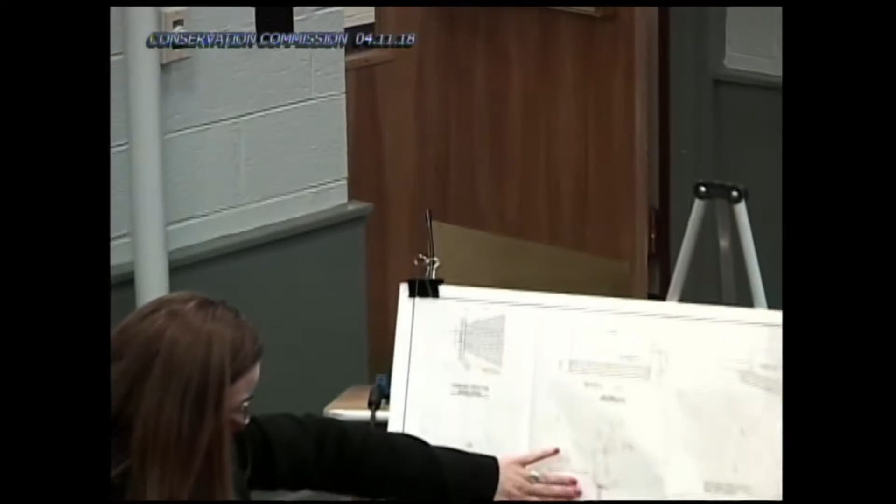We're not the engineers for the double track. I understand that question, but it doesn't look like there is provision for the second track over this culvert. When Holly comes back, she will present the engineered plans. Currently the layout reflects existing conditions. We are going to replace the culvert, and then maybe in the fall, I'm not sure of the timeline, they will install the second track. So when we're done with this culvert, it will still be one track. We didn't want to misrepresent that.

Wait a minute, are these related projects? Please identify yourself. Holly Palmgren, MBTA. There were two tracks along this entire alignment, which I'll show in my presentation after hers, but one of them was removed in the past 50 to 60 years. So this is capable of handling two tracks? Yes, there's enough space. That is why. Yes, there's room.

That's all I wanted to know. Right, we used to have two tracks. Okay. And I believe after the project is finished and the double track project is finished, there's still room within the headwall and the tracks. So it's designed to meet the requirements for the double track. You're not going to have to revise this plan to accommodate that. No.

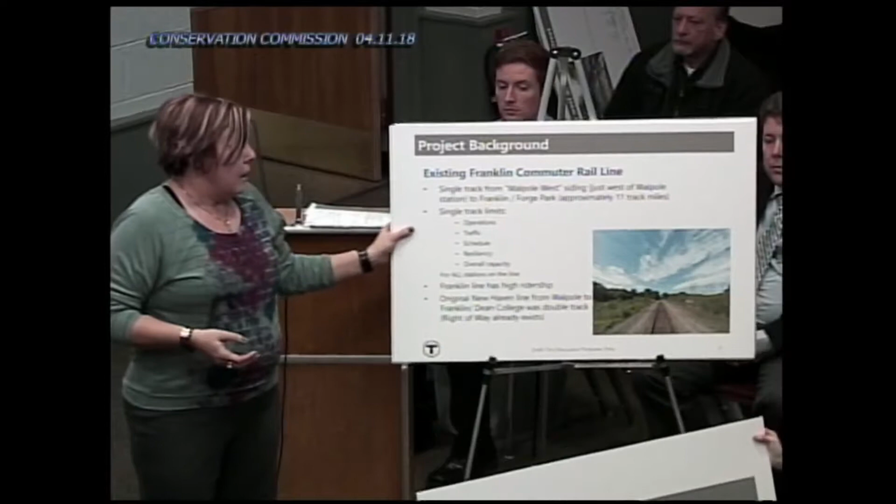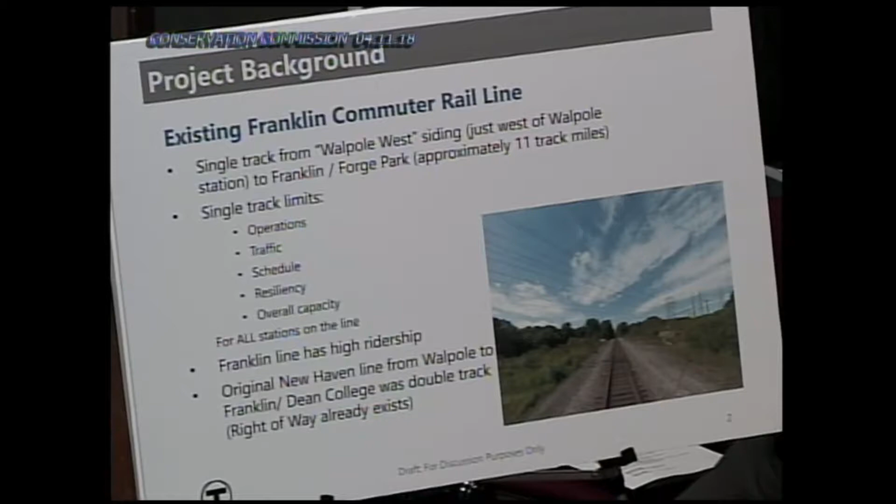It's along the existing Franklin commuter rail line. Right now it's single track through Walpole and Norfolk, which limits our operations sometimes if you ride the train. You'll notice sometimes the trains have to stop—this is where the only passing siding is, so the other train can pass. This will allow operational flexibility for the T.

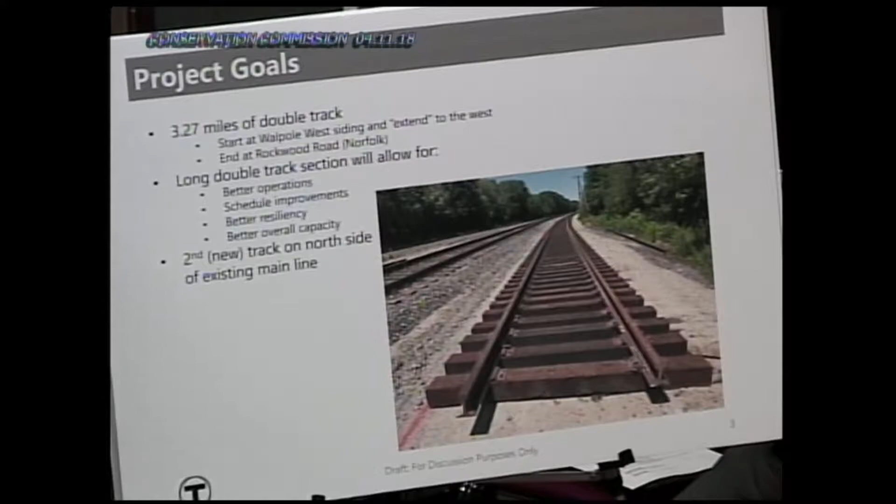So the Franklin double track project—obviously not all of it is in Walpole, but the whole project is 3.27 miles of double tracking through Walpole and Norfolk. This is the project from Norfolk Station all the way up into Walpole. This is the full project.

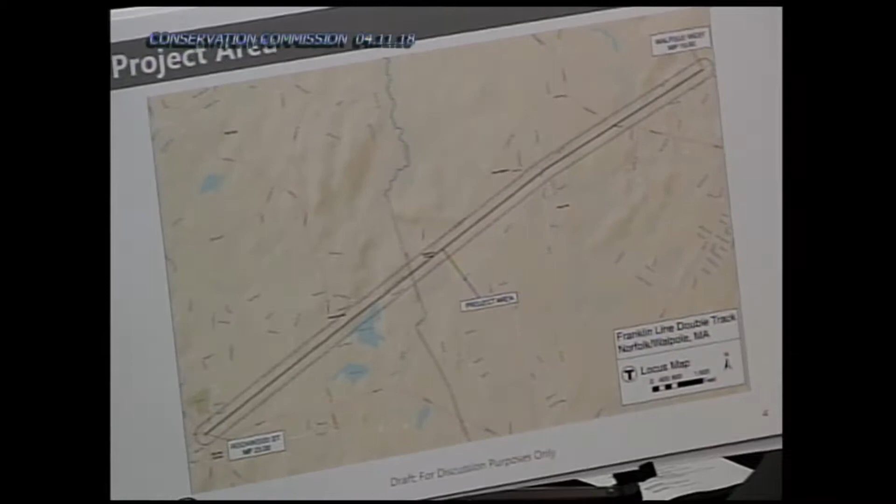So what I wanted to mention—you saw Keolis come in before for some culvert work that you approved, this new culvert. I have another filing on your agenda after this for some grade crossing work, and I have a filing for the double track work. So there's a lot of work going on in Walpole.

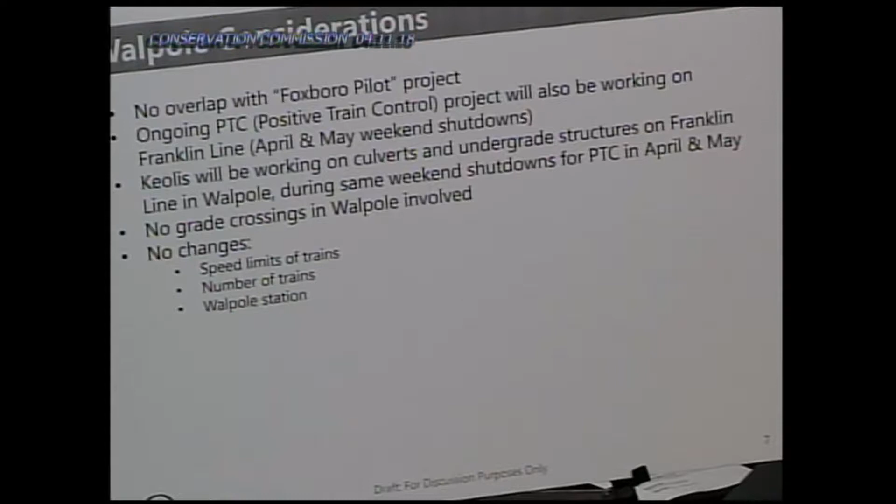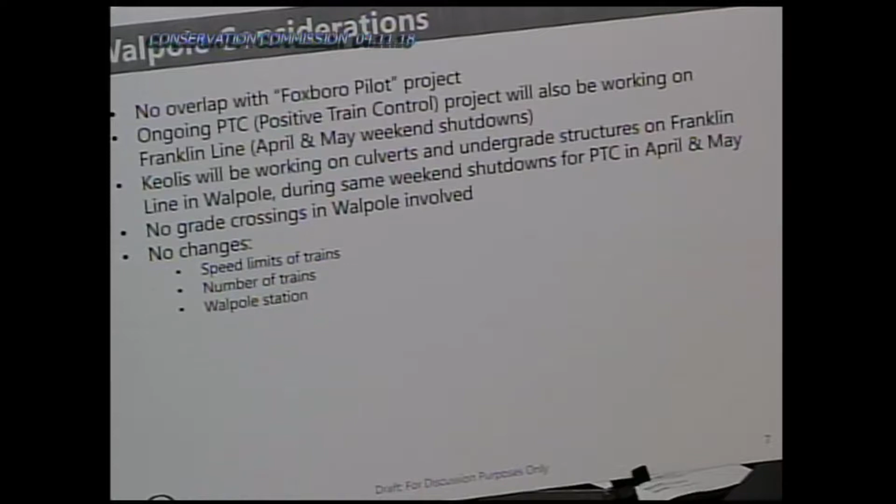This double track project is not part of the Foxboro Pilot project, which is its own separate project. You've probably seen poles going up along the alignment for PTC, positive train control, which is happening along our entire system, partly in Walpole. Keolis is doing the culvert work, which they've presented to you as well. For this double track project, we are not doing any grade crossings—there's a separate grade crossing project being done for safety enhancements over at Summer Street.

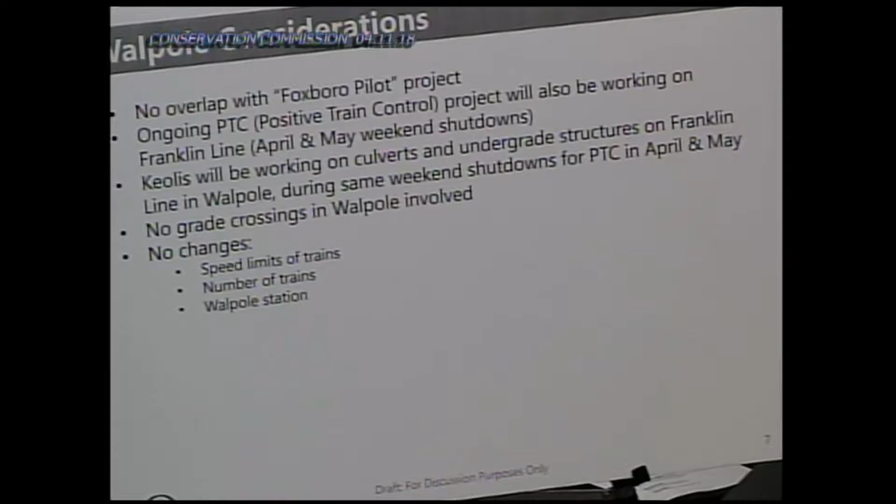So these changes are not going to change how fast the trains go, how many trains, or what's happening at Walpole Station. It just makes operation a little bit easier and less likely for delays.

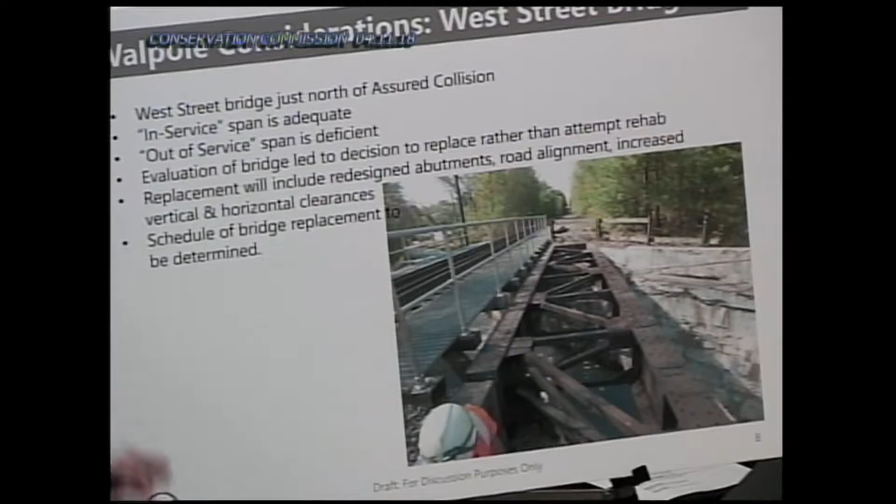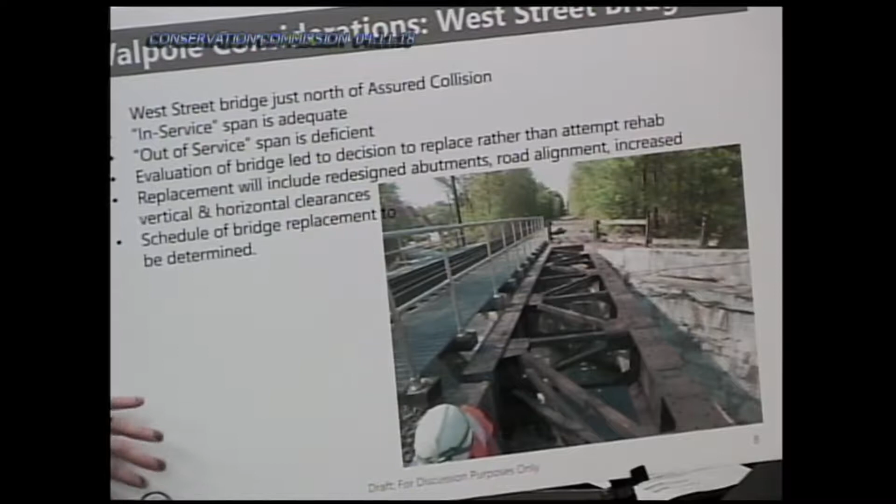I wanted to mention the West Street Bridge, which is not part of the double tracking project. The whole area currently slated for double track did have two tracks in the past when it was originally built. One track was removed, and we're reestablishing that. So West Street Bridge used to have two tracks on it—it doesn't now. It needs a little more work, so that's being done as a separate project, the bridge project. It is along where we're doing the double tracking, but it will be its own project.

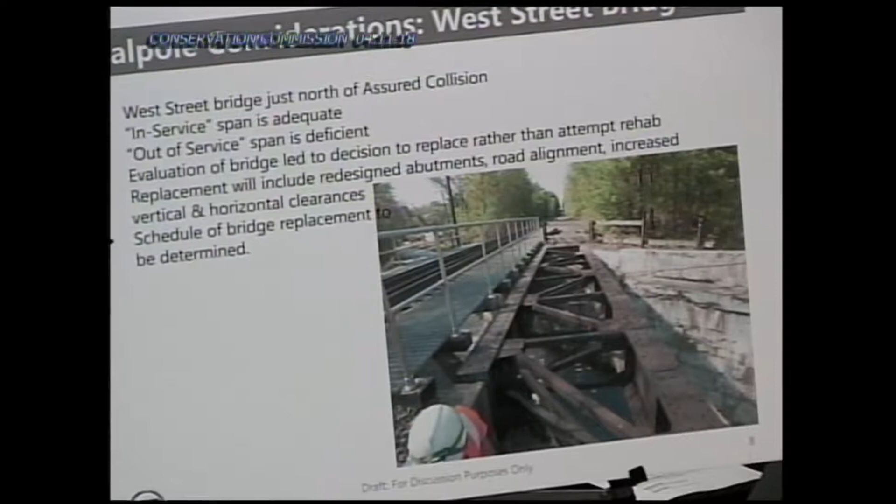I also wanted to say, because I know the town has expressed interest in the Foxboro Pilot project, I do have contact information at MassDOT if people have questions, because again, that is not part of the work we're doing here.

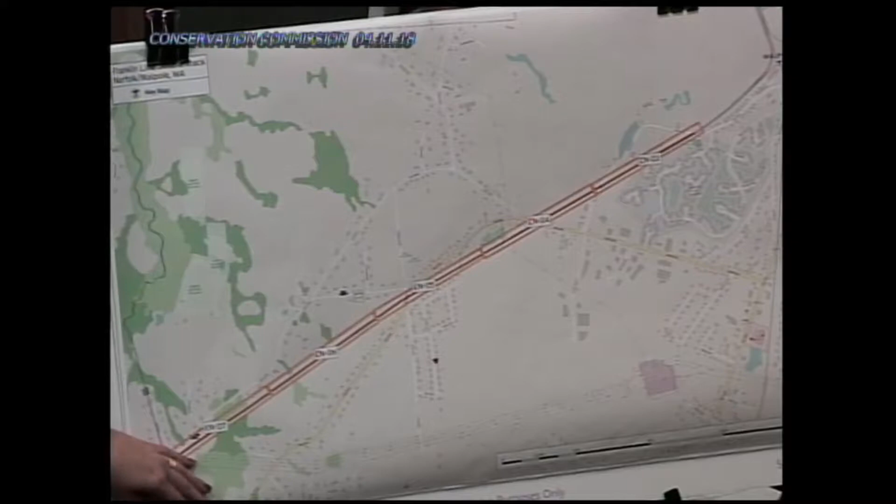So if I can get to the double tracking, finally—as the engineer had requested, we took and overlaid where all of the plans are so you can match them up and see where they were in town. I did submit a small size, but I can leave these full-size plans so at least you'll have one full-size copy.

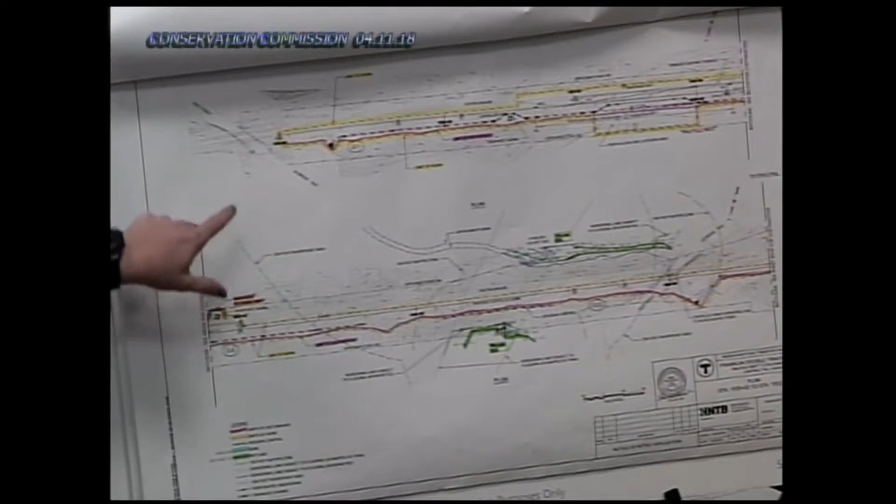So basically, all of the work remains within the existing right-of-way, and is just establishing the second track where there used to be a second track. It's along the whole alignment, and you'll see we do come within wetland areas. Work is within the buffer zone, and we've shown erosion controls on the plans where work is within buffer zone areas.

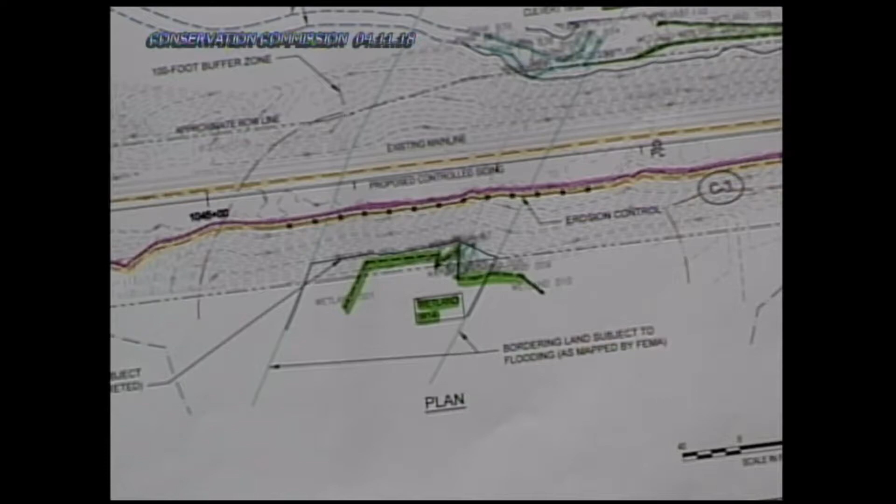Also wanted to mention, and this is an engineering quirk, that north on these plans is down, which is not how you're always used to seeing things. So just for your reference, so you can see where we are.

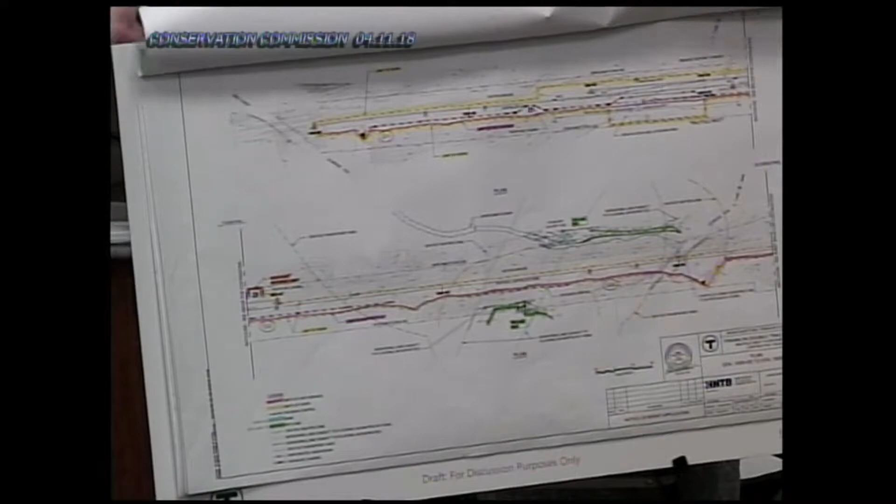I don't know if you have any particular questions with the work—I have all of the sheets. Paige, can you tell us what number you're on? Sure, so it starts at EN03, which, if you look at, the plans run from this end all the way down to the Norfolk line.

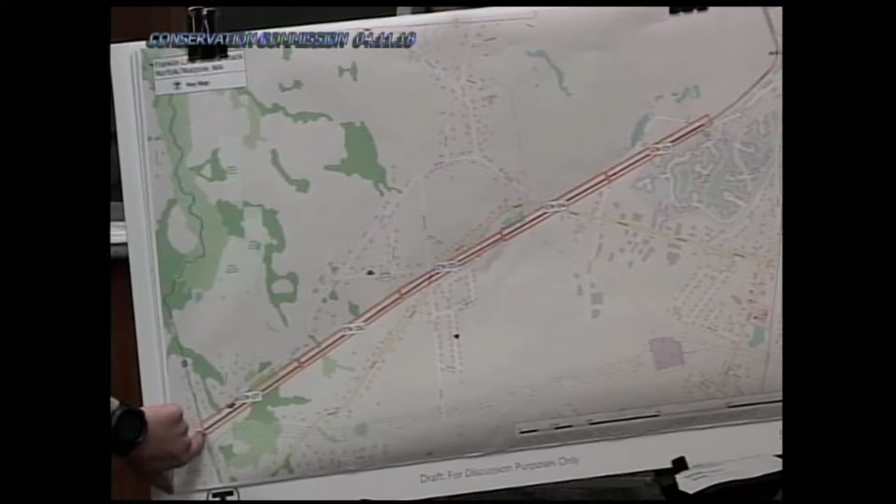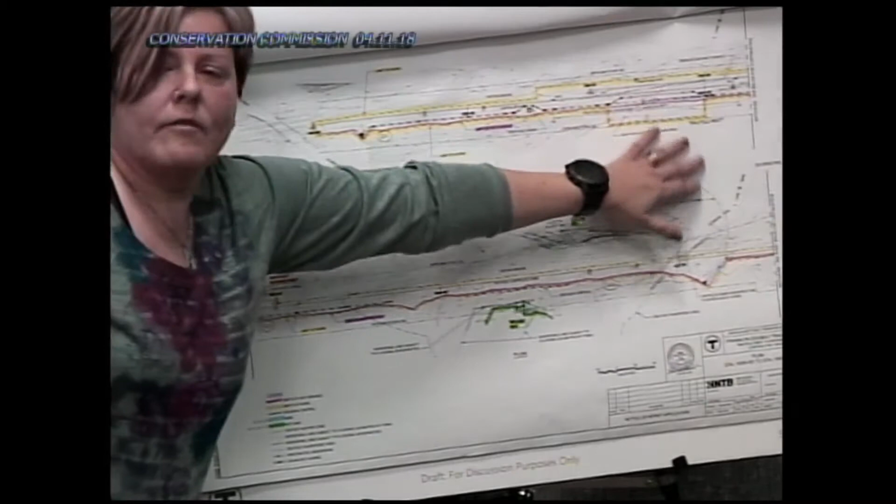And if you see on this plan—obviously at a smaller scale—these are the wetlands along where all of that work is happening. So you'll see this stretch does not have any wetlands. The wetlands come in here, and where we have wetlands, we show the erosion controls where that second track is being installed.

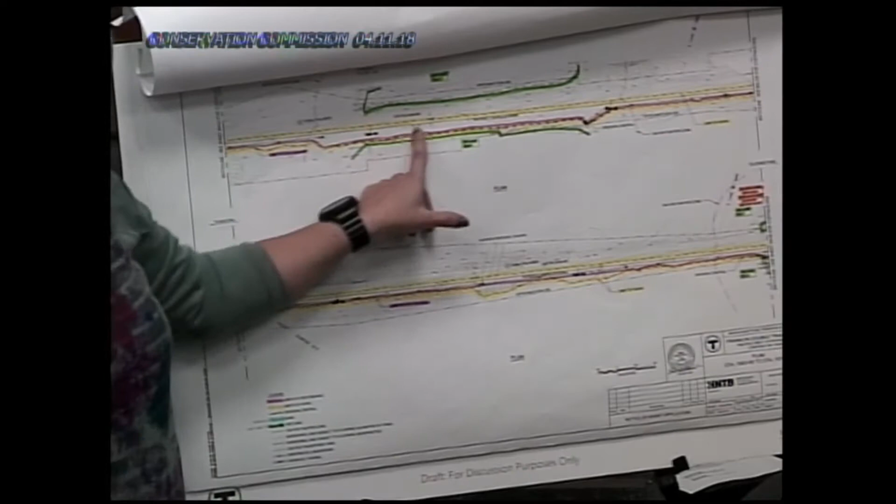And again here, wetlands, erosion controls. There are long stretches of the double track work that are not within resource areas, but they're on the plan, so you can see the entire length of the project.

Go to the revised plan that I sent. Oh, we didn't get there yet.

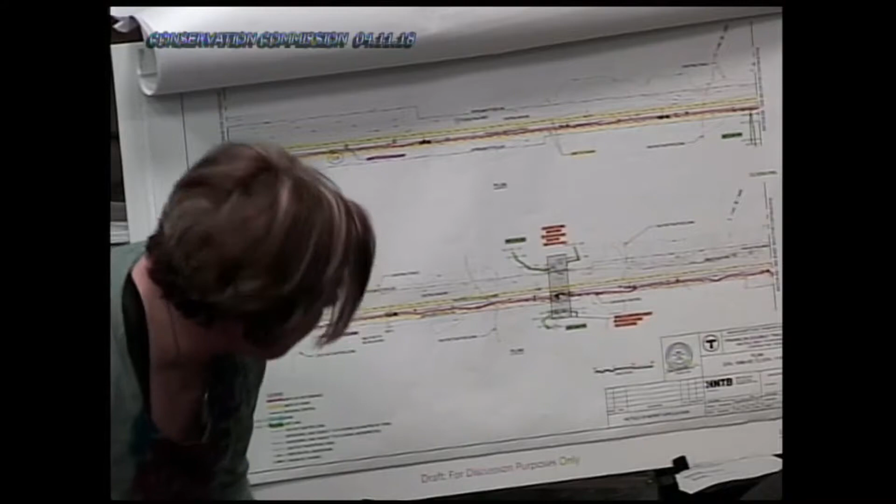So Keolis's culvert is noted on this plan. You'll see this big box. E06 is the plan that it's on, EN06, so this represents the filing that you just heard. I don't have the details of their culvert on our plan because they don't have the details of my double tracking project. But as we mentioned before, there were 2 tracks there. There's room to put 2 tracks back, and we've coordinated with Keolis to make sure that when we come in and put the second track, it all works together.

And then the revised sheet that I just submitted was for EN07.

Holly, can you just explain, on 6 again, where the culvert was, it was my understanding that some drainage system was going to be put in? Yes, so in this location, you've done a site visit out there and looked at that. So there will be, it's noted on this plan, as a perforated underdrain.

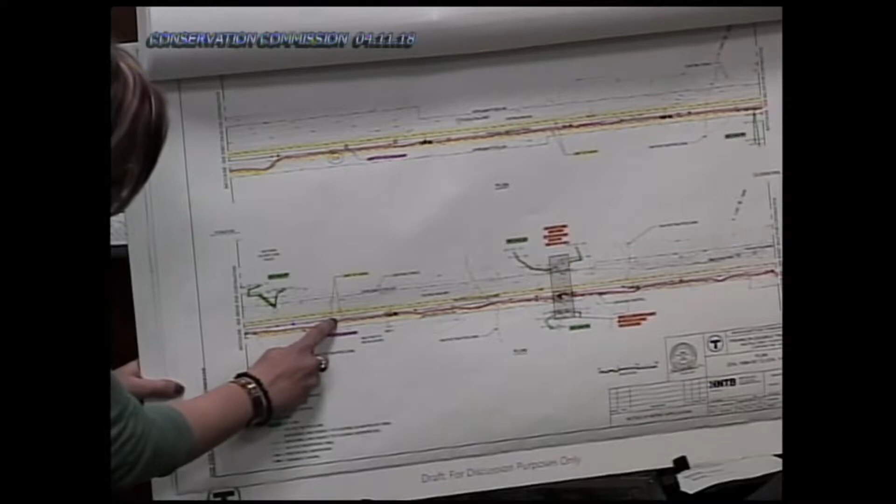So it's this line with these little triangles, which would then outlet where that culvert outlets. So currently there's a ditch along the edge of the right-of-way, and that'll be replaced with a perforated pipe. Yep, and we did do the drainage calcs for that, and our typical underdrain is 12 inches.

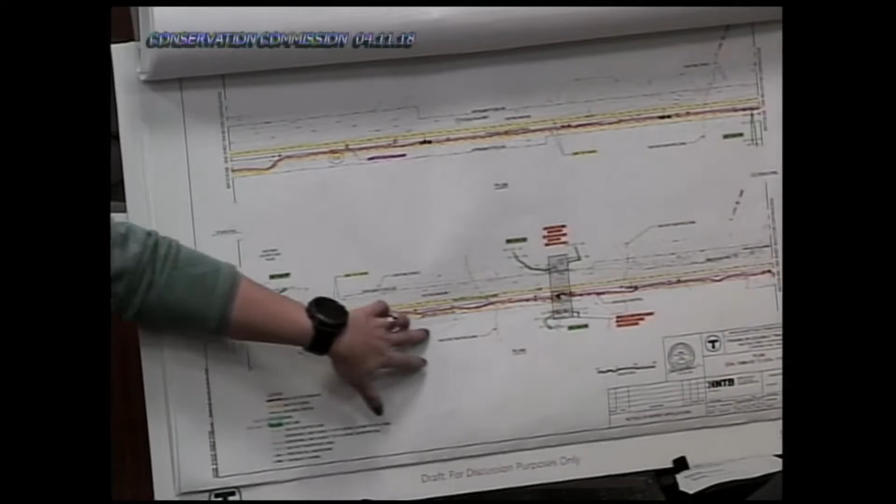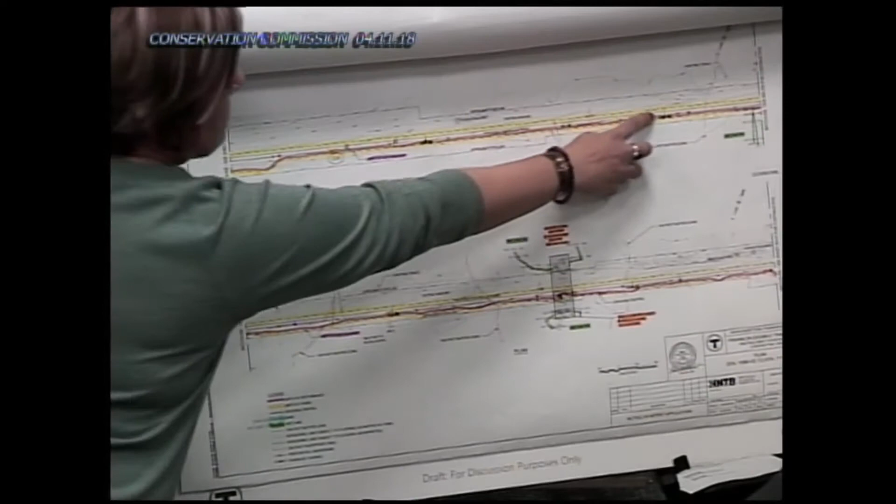We've upgraded this to 18 inches, just given what we think the amount of water is that's out there, as you saw. And is that the only stretch where that's occurring? So there is underdrain along a lot of the right-of-way. This part's not near wetlands, but yes, it's underdrain, which would then outlet there.

And so is there any area near the wetlands where you're going to be changing from a ditch to an underdrain, or is it just along here? Nope, that's the only location that's currently a ditch that's becoming an underdrain.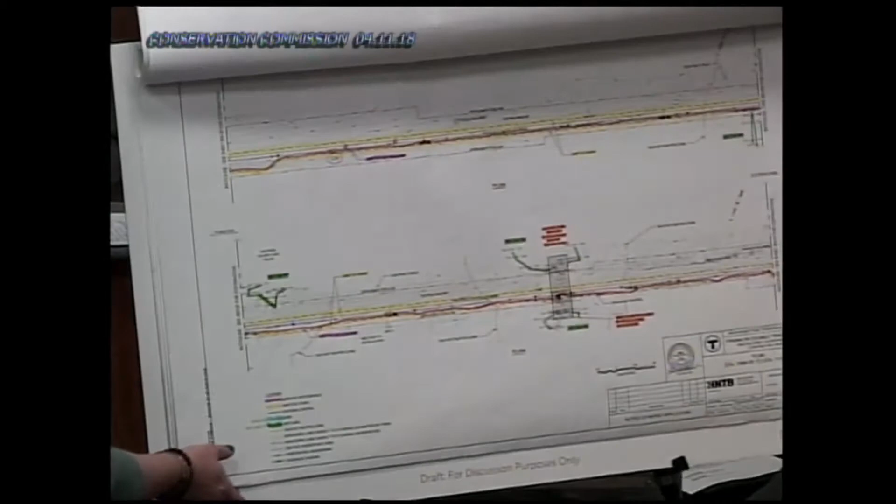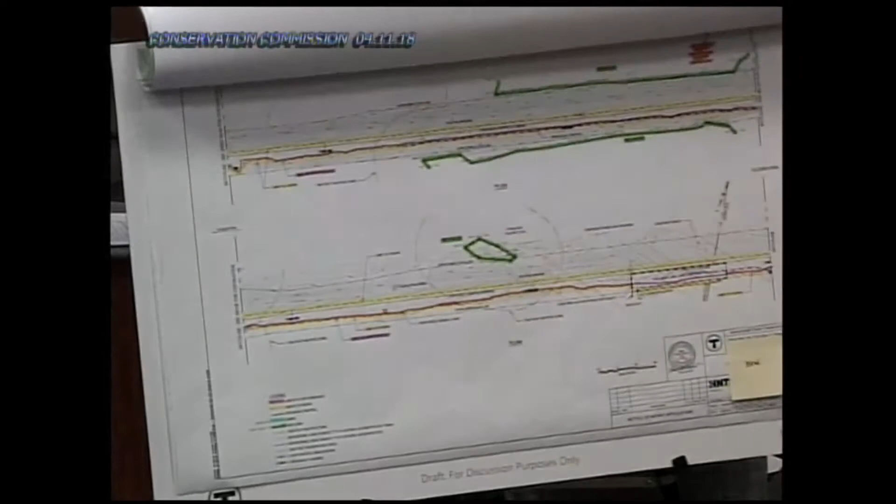So yes, you can see this underdrain comes here and then connects into where that culvert comes out. And the change on EN07 is the original plan that I submitted showed a retaining wall, which we have removed. It's now just going to be a slope, 1.5 to 1 in that location, at station 1122.

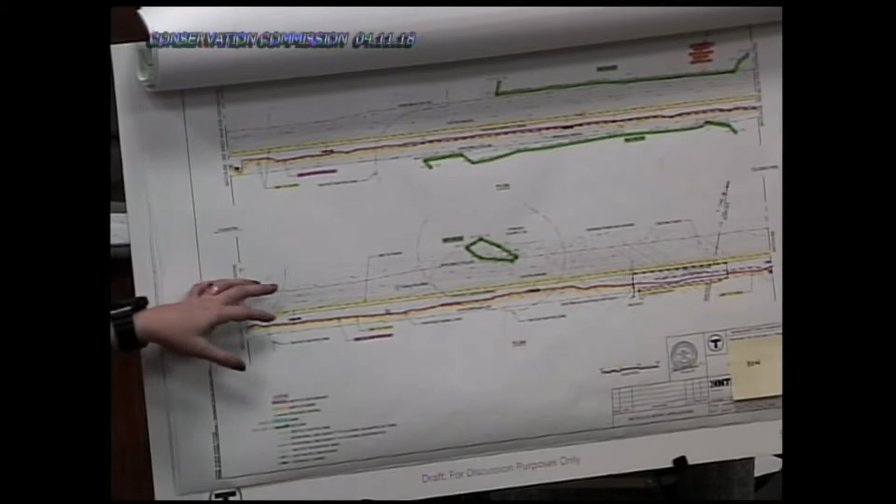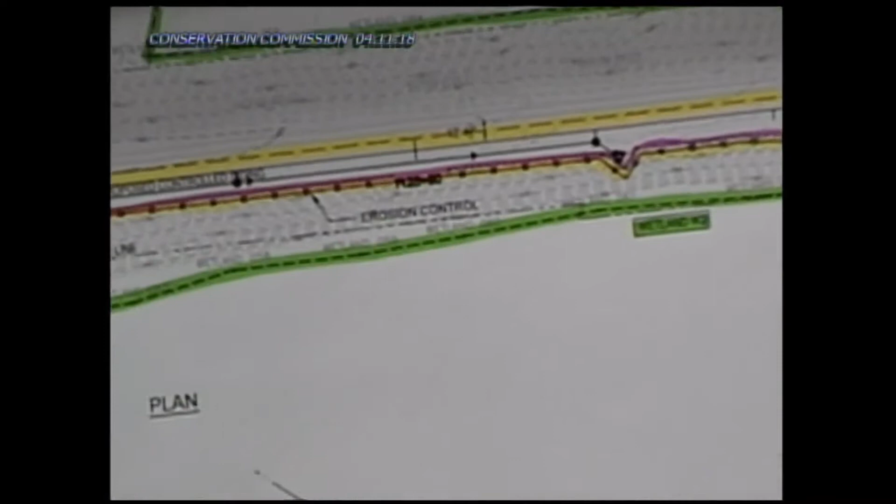So if I go to the old plans, we had a wall. Yeah, see right here. It says proposed retaining wall, that dark line. We went back and reevaluated and determined that we could do a slope there and took the wall out. That's on the other side of the wetland, so it doesn't impact any of the wetlands. It doesn't impact into the wetland, no, the work is just within the buffer zone.

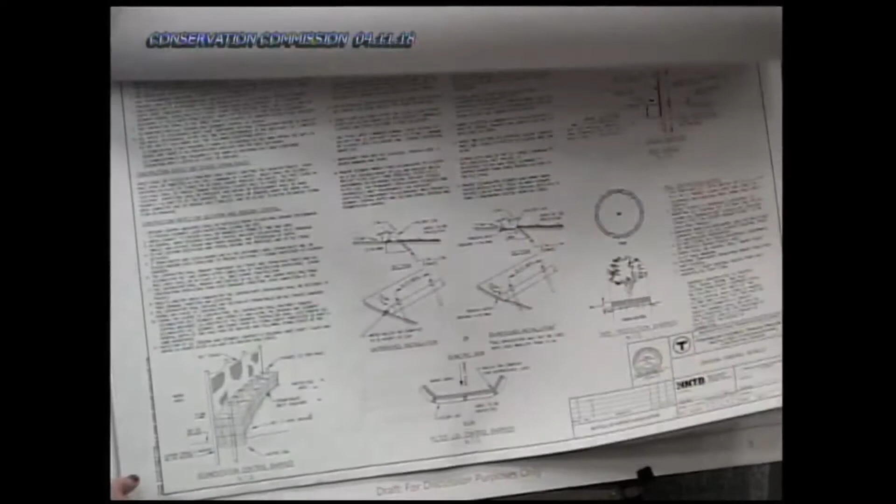And in the plans that we submitted to you, there are details for erosion controls. We have details for both straw bales and silt fence, as well as filter tubes. And this detail shows that perforated pipe drainage we showed you. This is just a standard detail, so it says 12-inch minimum, but this one is 18 inches in this location, given the amount of water.

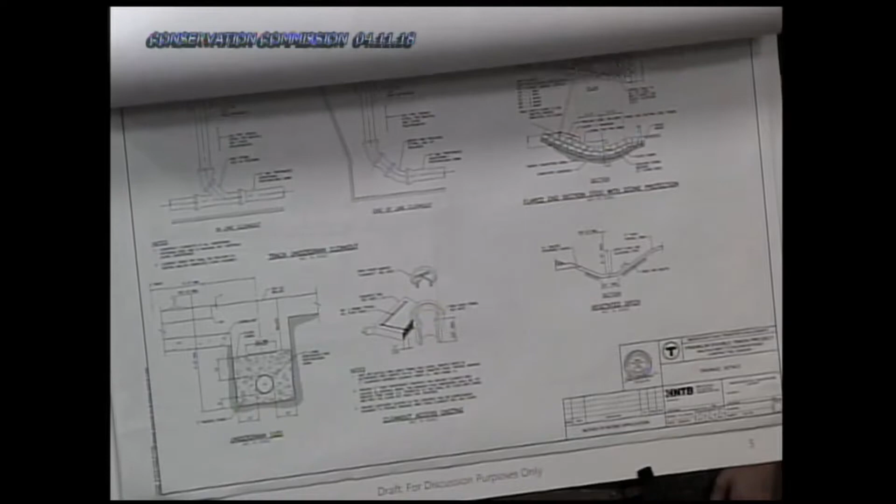I don't have any specific concerns because they're really not working within the resource, altering any resource areas. My question at first was just to go out there and look at the ditch to make sure it was a drainage ditch and not a resource area, and it is a drainage ditch, and that closing it up with a perforated pipe wasn't going to impact the resource areas. I don't believe it will. That's all I have. Okay, Roger?

The total right-of-way hasn't changed, has it? How wide is the right-of-way? No, the width of the right-of-way is the same. What about the width for the elevation of the tracks? Right, so we stay within that.

Right now, if you look at it, there might even be a photo of these roads. It almost looks like along sections of it you could drive a car down there. They use it sometimes as an access way. So there is space within the existing right-of-way to put the second track.

And the elevation is the same on the tracks? Yes, I had to look to my engineer, he's shaking his head yes. Is the same, yes. I would imagine it would be.

Many moons ago, when I was younger and blueberrying up in those tracks between the two overhead bridges, there was an area covered with a couple of rocks which had the most beautiful water for drinking and cleaning the blueberries with. Do you know where that is? I do not know where that is.

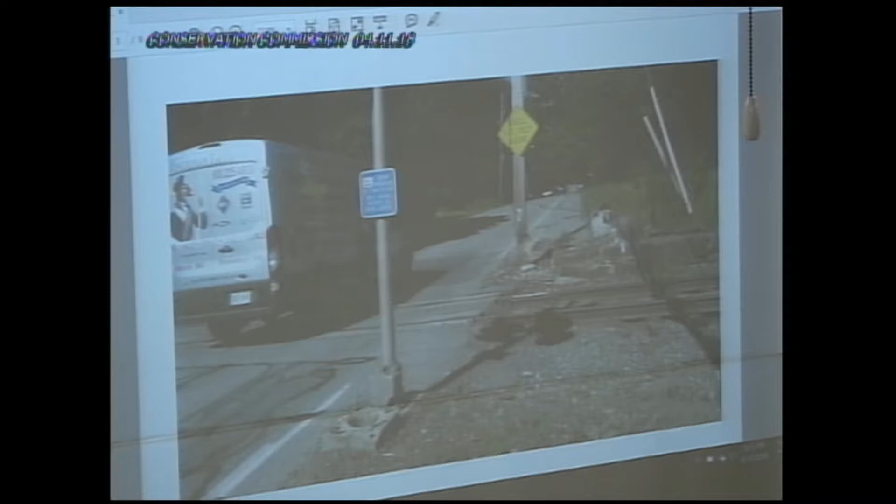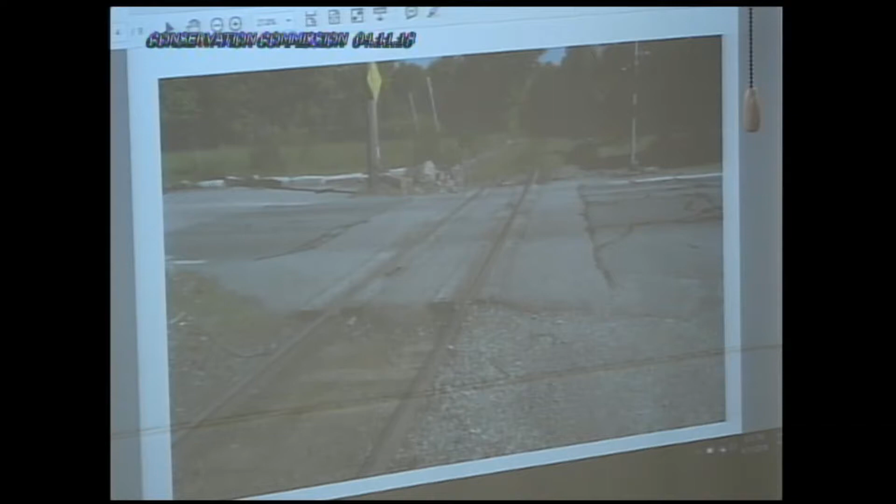This is standing on the post office side, on the south side of the crossing, looking north. You can see the existing surface. It's timber and asphalt in poor condition.

This is a picture of the sidewalk that approaches on the east side of the crossing and terminates at the post office parking lot.

Again, a photo from the north looking at the post office parking lot, the grade crossing showing the existing crossing with flashers and a gravel parking lot for the post office. There is no delineation, nothing separating the tracks from the parking lot.

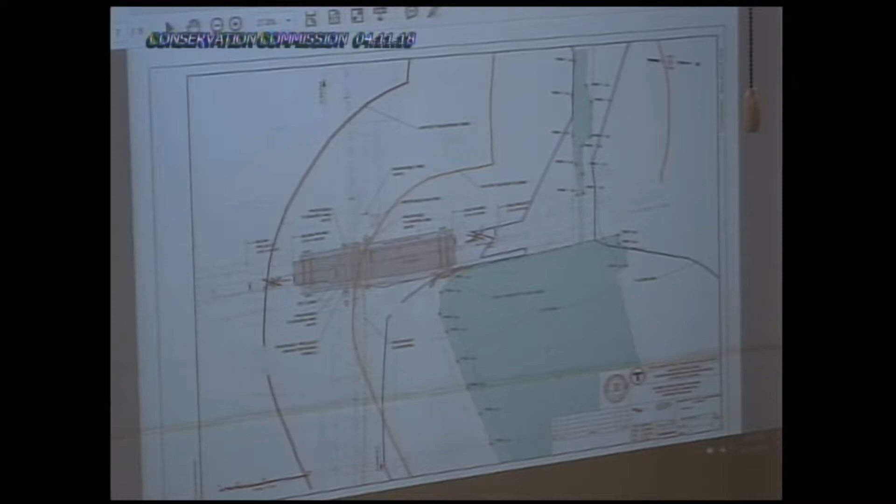In addition to the flashers that are out there, we're increasing the size of the flashers, 8-inch today to 12-inch, to increase the visibility of the flashers.

At the meeting mentioned in the letter from the town of Walpole, the town requested high visibility pedestrian crossing warning devices for each of the crosswalks. So we'll be adding them, you've probably seen them around town. They have a standard detail for them. There's a button, it's solar powered. It has the typical signs for a grade crossing, but it's also supplemented with flashing lights to warn cars that there are people intending to cross.

And at the post office parking lot, we are adding guardrail to separate and delineate where the track right-of-way is from the space available for the post office. At the end of the guardrail, there'll be a pipe gate to restrict access from vehicles down along the right-of-way. Similar thing on the north side of the right-of-way, a pipe gate, and then there'll be a signal cabinet to control the signal equipment that we're installing.

Let Dan come back and talk about the resources. So the resources in this area are all associated with the Neponset River, both the channelized section to the north and the impounded section to the south of the roadway. There's no proposed impacts to the river itself.

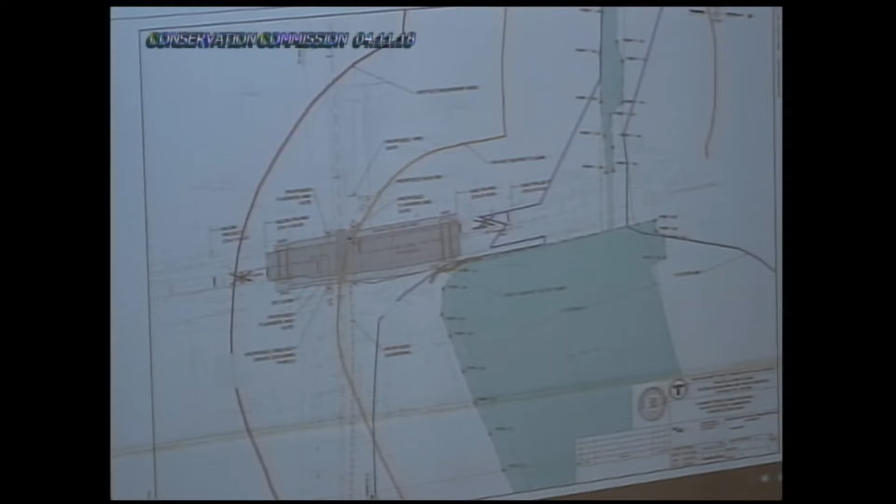As I look at the plan, I see the gates for the road, and a little smaller one - is that for the sidewalk, so somebody can't walk by? The smaller, the high visibility pedestrian crossing gates? Yeah, right here. On the map it looks like a skinny triangle. So I'm seeing one for the roadway and one for the sidewalk. This gate protects the sidewalk and the roadway.

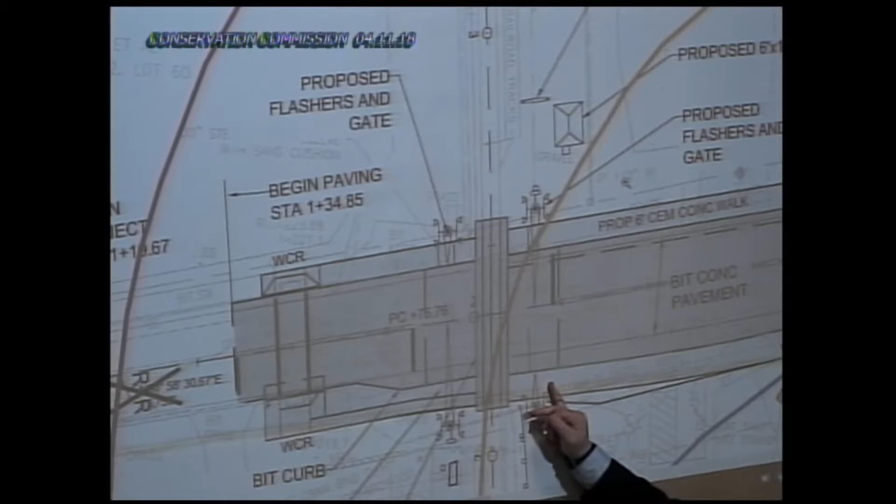This gate protects the sidewalk. This gate protects the sidewalk and the roadway. And this gate protects this walking path across the post office parking lot. So you're expecting the roadway one to do double duty, right? Correct. Okay, that's what I was getting at.

And compost socks down near the pond - my feeling is that it should be a little longer in each direction, because when people start doing construction, soil and sediments get spread out more than just a couple feet on each side of the job. Okay, yeah, that can be done.

Do you have anything else, Al? No, that's all. Do you have any filtration socks going into the catch basins? Yes, there would be silt sacks going in there - the ones by the dam? Yes, all of them in the front, within the project limits.

All right, the project - there's a basin here and a basin here, and there's a basin further to the east. Which side of that area? Beyond that way - something we could add. We could add that, because the flow is down in that direction, so you'd be working there if you add those to the catch basins further to the east.

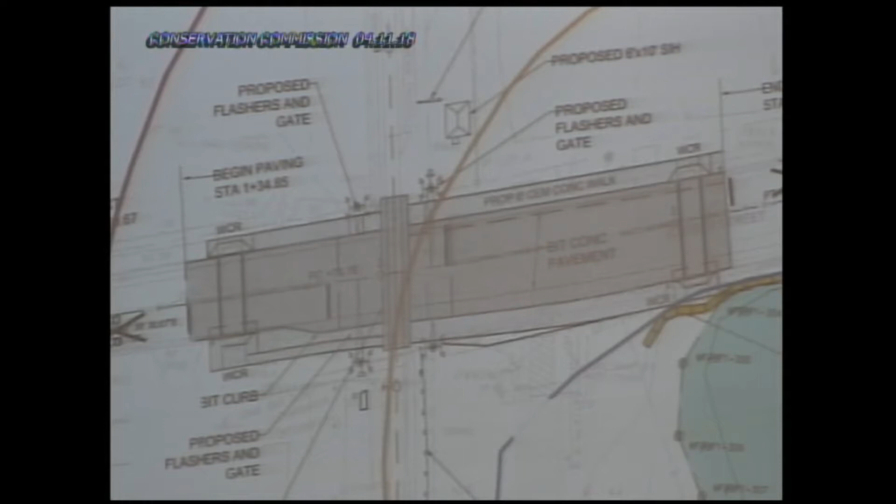So the other thing is the impact of that construction on the neighbors in that area—when is it going to happen, how long will it take, and the impact it would have on the water right there, coming right down into my backyard. I don't know what you're doing to protect that.

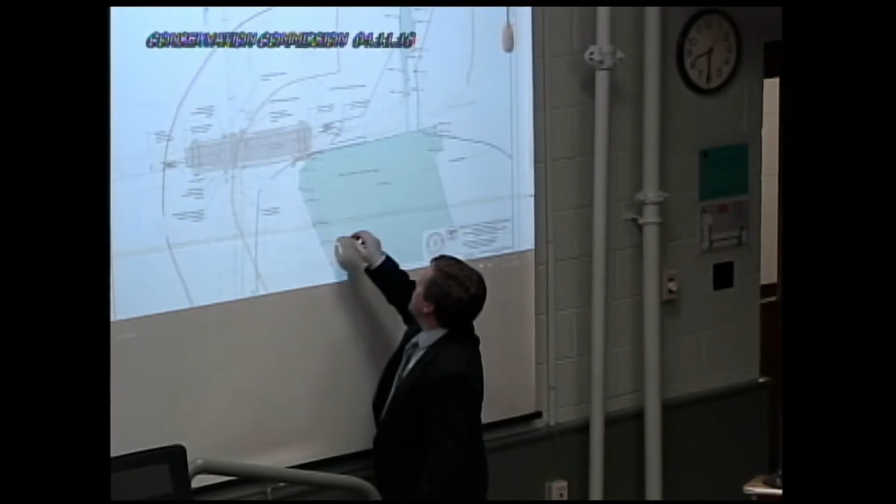We're putting silt socks in the existing catch basins. Where we're excavating in the floodplain, we're putting a silt compost tube, which the commission asked we extend, so yes, we'll make that longer.

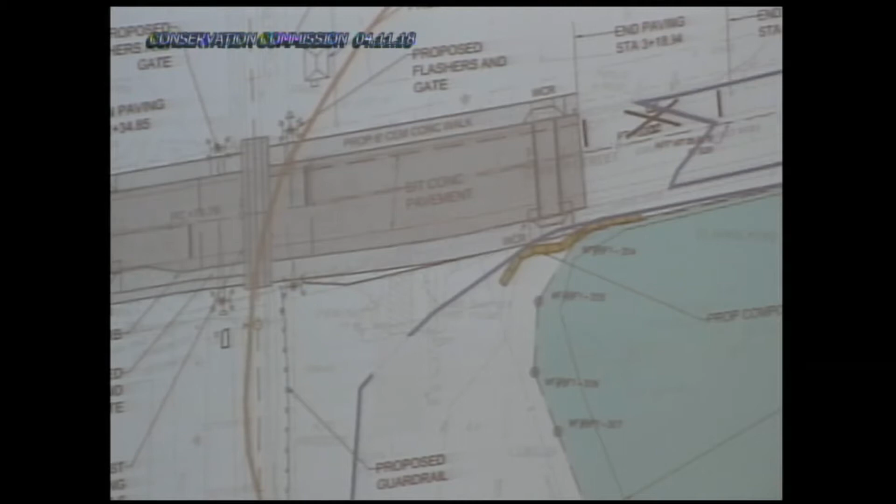The limit of the excavation is over here on the other side of the road, and then some here to install the cement concrete walkway in front of the post office. We'll extend this down here to protect anything going this way, and the silt socks and catch basins protect anything from runoff on the roadway.

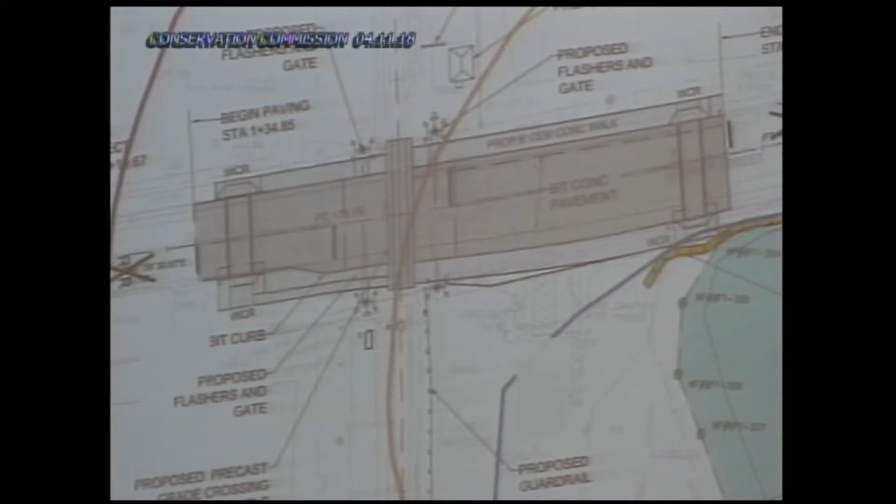Can I ask one more question—where is your staging area? When you're taking up the road, where are you stockpiling it, or where is your equipment going to be located during construction?

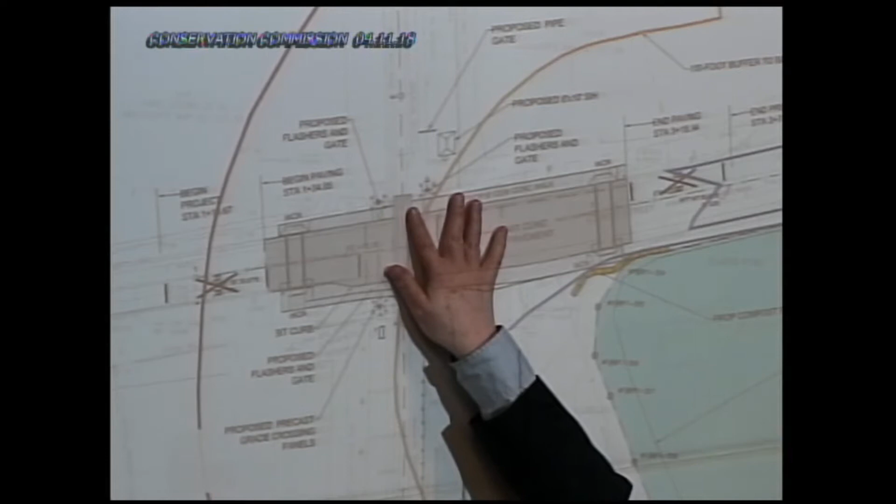For the grade crossing, there is a considerable amount of right-of-way here, so there's room available in the disturbed gravel area that extends up to the top of the page, giving room to stockpile materials. The work in the roadway can be done with conventional rubber-tired construction equipment that can be moved off-site during construction.

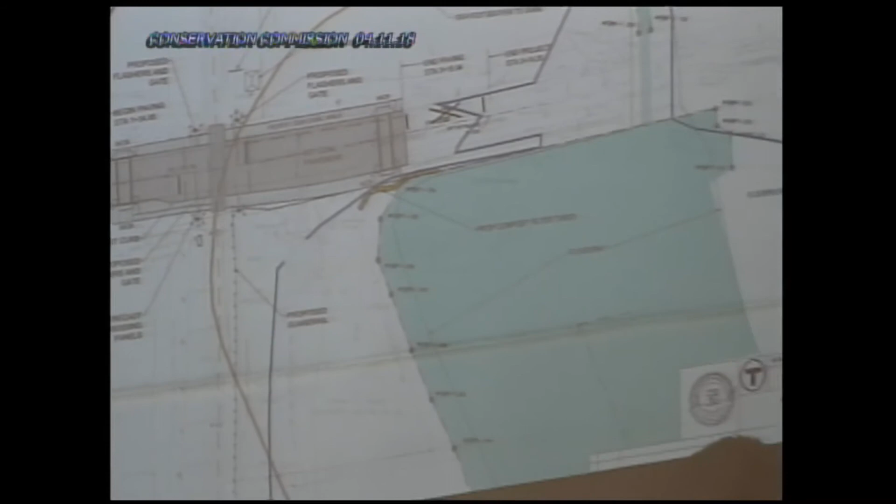So your staging area will be on the right-of-way side that's furthest away from the pond? Yes. Okay, so any stockpiled material should also be ringed with erosion control around it. Okay, yes.

Anything else? We'll make a motion to close the hearing. So moved, second. Further discussion? All in favor? Aye. Opposed? 4-0 vote. Order extending the erosion control with additional silt socks, and staging, stockpiling, and storing of equipment.

So someone make that a motion? So moved. Any further discussion? All in favor? Aye. Opposed? 4-0 vote. Thank you.

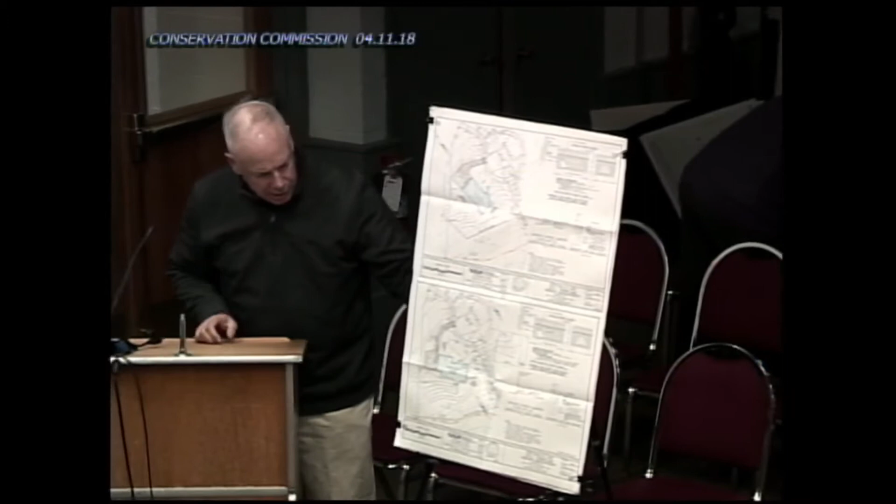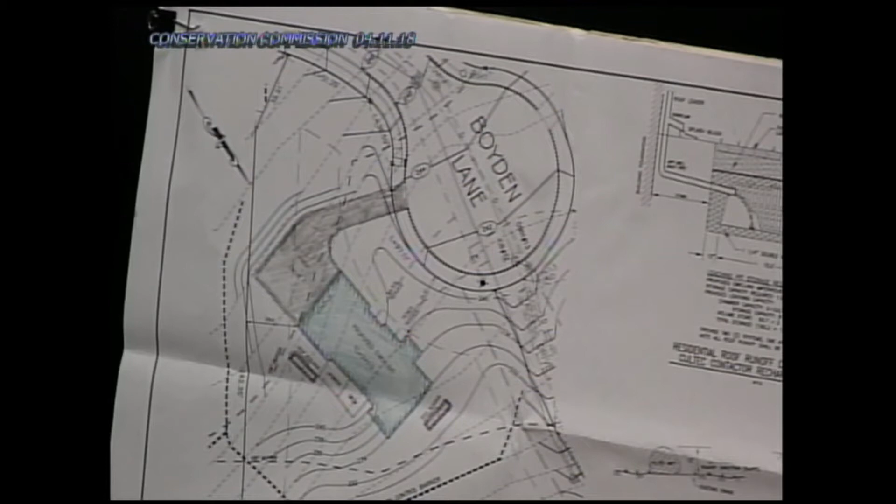Essentially, what you see on the top plan was the original approved plan. It seems that the orientation of the house doesn't lend itself to creating a good neighborhood environment for the houses as they surround the cul-de-sac, so we've decided to move the house back a little bit and make it more parallel to Boyden Lane rather than parallel to the cul-de-sac as it was previously proposed.

And essentially, to do the proper site grading, we've moved the erosion control further back to just outside the 25-foot no disturb zone, as you see along the line here. Previously it was up in this area. So that's really the change that we're asking for.

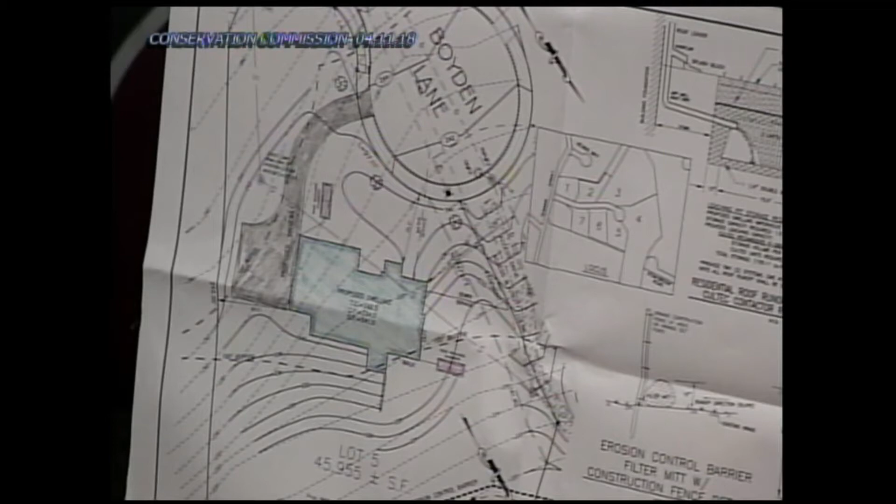So the change in this plan, there's additional buffer zone that will be cleared and graded down to the 25-foot no alteration area, is that correct? Well, the grading actually is going to be just slightly beyond what was previously shown. But there's going to be some tree removal in this area because the trees are so tall that we really wouldn't want to have them overhanging next to a house. So we're going to clear that and reinstall.

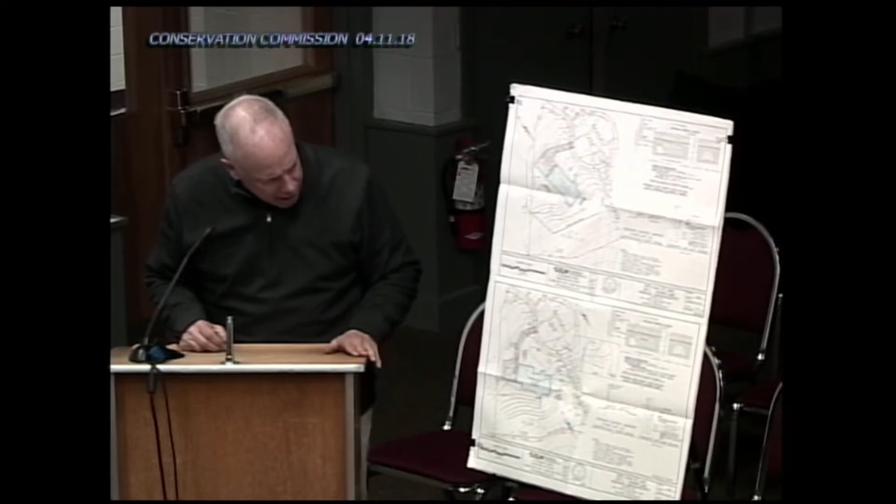It looks like you have a little more driveway area as well. And how is the driveway sloping? The driveway slopes a little bit further down from the roadway, because there's quite a slope there now. The top of the concrete of the foundation is at the same elevation that was originally proposed. The roadway is at 242, and the top of foundation is proposed to be 242.

But there will be a slight grading in the front yard, because usually there's about 2 feet of concrete exposed. We could raise the foundation higher and make it a little bit higher than the roadway. I'm more concerned with the water flowing down Boyden Lane into the driveway and down the slope. We would be concerned about that too. We don't want water coming from here down here. Right, so there's a hump.

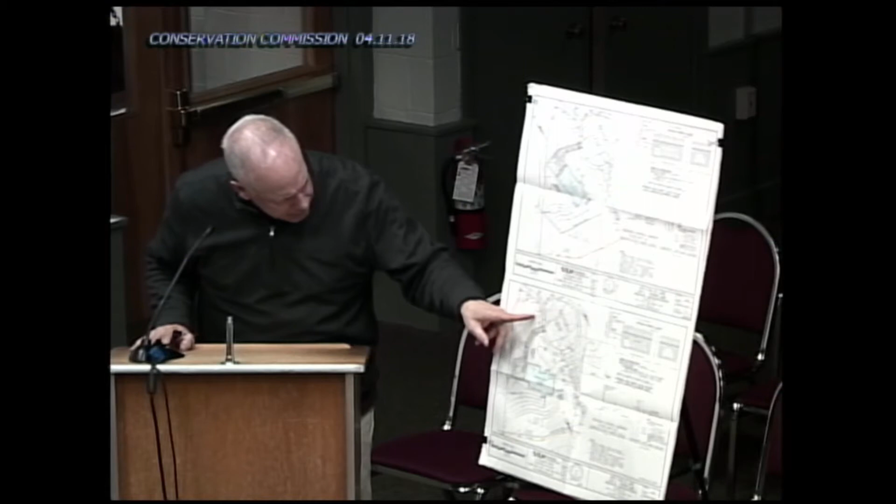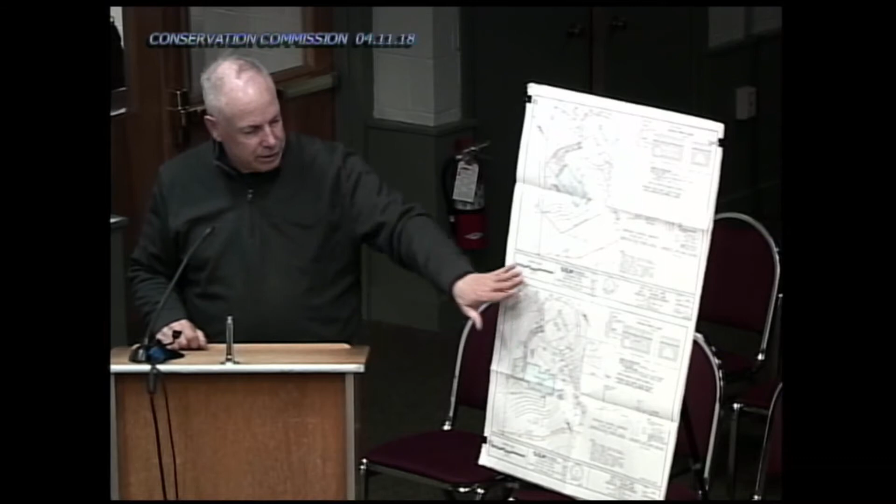Yeah, we'll make sure that the sidewalk stops here, and that there's some sort of a lip to the driveway or a berm that keeps water from going onto that, because as you know from what we've had to deal with, there's more grade there than you can tell. It's all downhill, and it's more of a path downhill than the original plan.

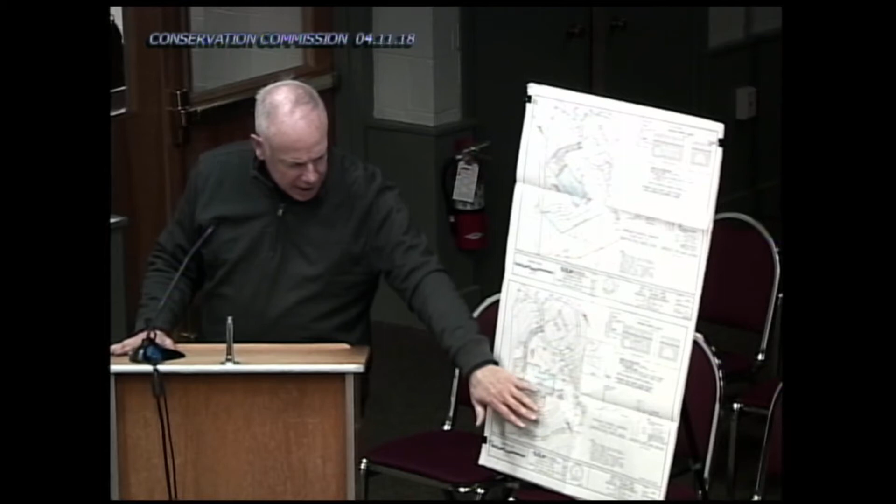But again, the backyard is pretty much a walkout basement, just like previously the walkout basement was on this side of the house. Now it's more in the back of the house, and it's going to lend itself better to grading the lot so that it's not as steep a situation as you see it today. It will create a better situation for the house location.

Anything else? The question is whether this is a minor modification, or should it be an amendment, or a plan change? Roger, any questions? No. Betsy?

I don't think so, because most of the house looks like it's still outside of the 100 foot. The house is just a little corner of it that encroaches. But there's gonna be a change in the lawn, right? More lawn back there. Yeah, there's gonna be some more lawn in this area, more in the 50-foot to 100-foot area.

So probably our usual plaques are in order, so that if people are gonna be walking out onto their lawn and walking further, we have those plaques on the plan at the 25-foot zone. We have those in already, and they were on the original plan. So it's just a little bit more backyard for the homeowner.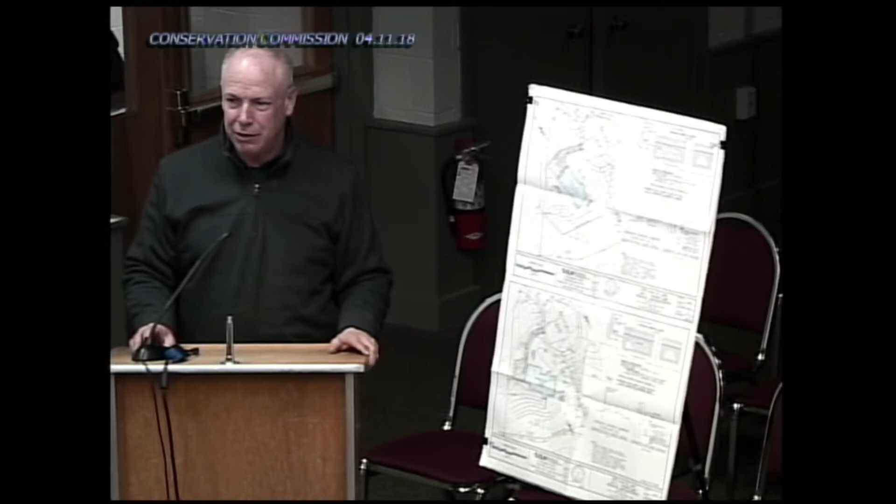Is that the sewer line that's going through part of the house? That was the previous, the old sewer, the old line that they showed. It's not there anymore because now the sewer line goes down here. But I'm glad you picked that up, because we would not be doing that, putting that sewer line through the house. Yeah, I would think that you'd wanna move that.

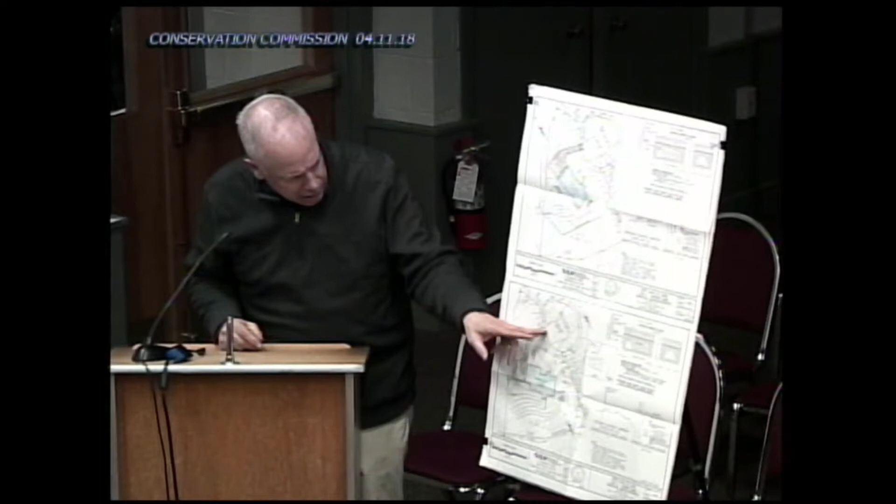Okay, so I see the sewer in the street comes down. If you look there, the sewer and water service go around the left-hand corner of the house. This sewer line then goes to the street below. Yeah, this is the sewer line here. Okay, then where's it go from there? Goes down the easement, and then it goes out towards the back of the property, wherever it connects to the street off of Winter Street.

It goes through the wetlands, okay, and then it was all put in with Evans Way. You wanna take that line off your plan. I will, I didn't even pick that up, I'm sorry. Okay, all right.

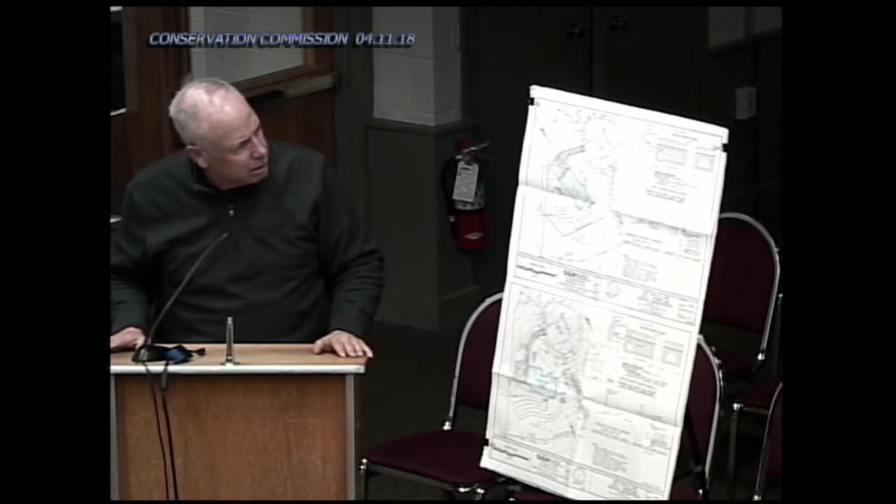Someone make a motion for a minor change? So moved. Second? Any further discussion? All in favor? Aye. Opposed? Abstained. 4-0-0. Thank you, okay, so minor.

You wanna talk about Boyden, or am I off the hook? While you're here, we have anything else to discuss with the code? Yeah, we had asked Mr. Petrosi to submit a report on the erosion and sedimentation issues that have been occurring at Boyden Estates, and also to address the issue of the flow going through the replication area and down Boyden Street, Boyden Lane, which was not previously represented on the existing conditions plan for the subdivision.

Yes, well, as I mentioned in my memorandum, we took some measures to alleviate it. It was our observation when we were on the site that the replication area was not constructed according to the plan, and that the base of the replication area needed to be raised, as well as the berm around the replication area and the sloping to the roadway. We've taken those measures, and we had the experience of 2 or 3 winter storms at the end of February and the first 2 weeks of March. As you see in the photographs, there was no erosion or overflow of that replication area.

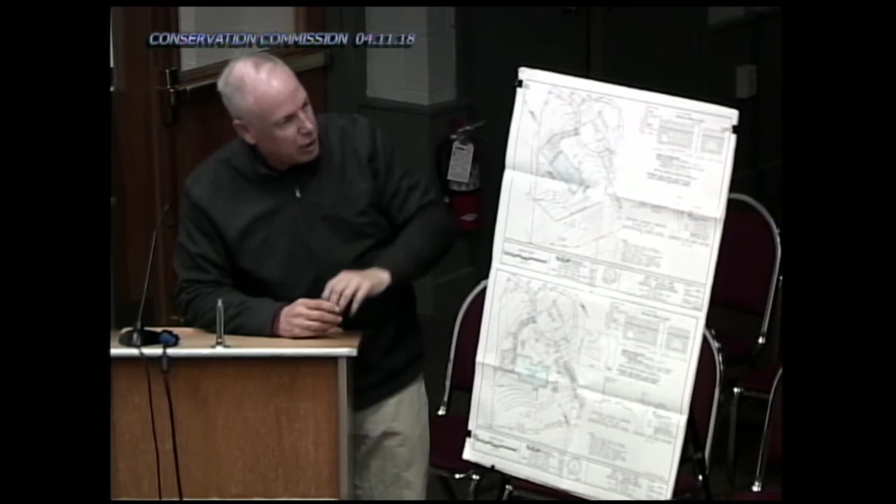So let me just, while we're having this discussion, show that the replication area is located in this area, and the flow we're talking about went across the driveway for lot 3, where the existing house is, and it went down in this direction, which is now towards the detention basin.

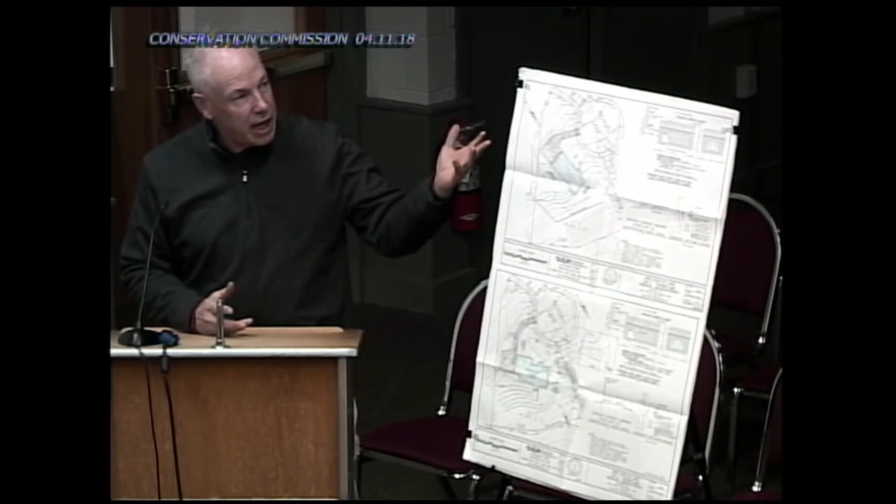Let's assume there is flow that you want us to reproduce in terms of the calculations. Is it the commission's discretion to reestablish that flow via some sort of pipe, or would you simply say - we don't know yet until it gets all recalculated and Rob comes and presents something.

We're really talking about a minimal flow here. Do you know what size pipe was in there? It was like a 4 or 6 inch PVC flex pipe that just ran underneath his driveway. We're not talking about a lot of flow here.

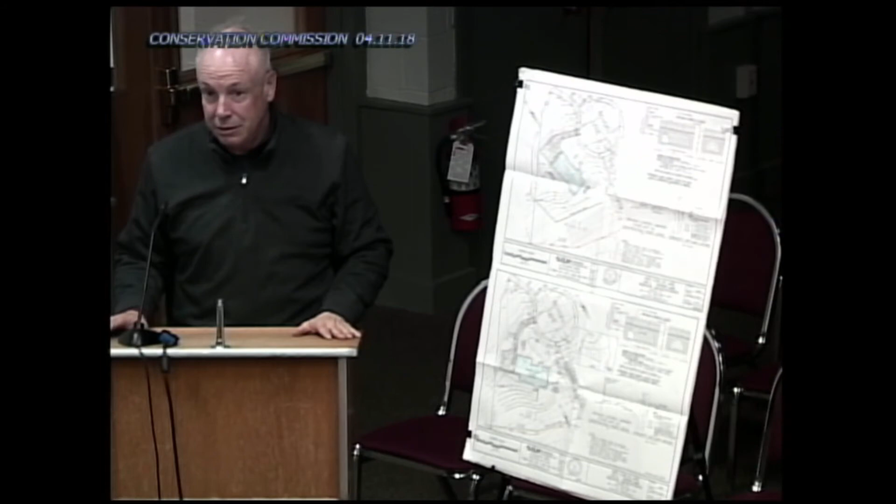I don't think it's clear, unless the commission is of the mind that you want to reestablish that pipe connection into the drainage system. I'm not quite sure what the goal would be. We can't just do it on the fly without the engineer here with the plan - it can't be like, oh yeah, let's put that pipe in.

We've had many discussions about this, trust me, I'm not flying off the cuff. We've met on the site with Landis, I've met on site with the project engineer.

I keep saying the same thing - present to the commission the existing conditions that weren't shown on the original plan. I'm just playing out the scenario, I just want feedback from the commission.

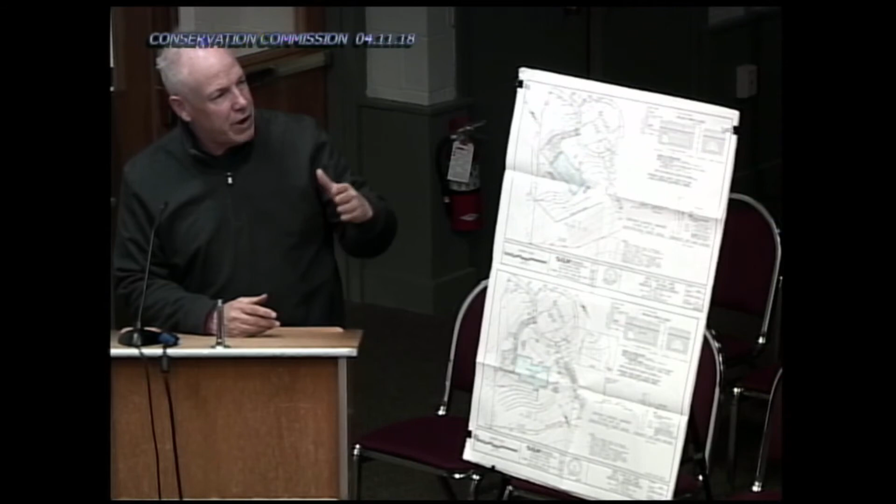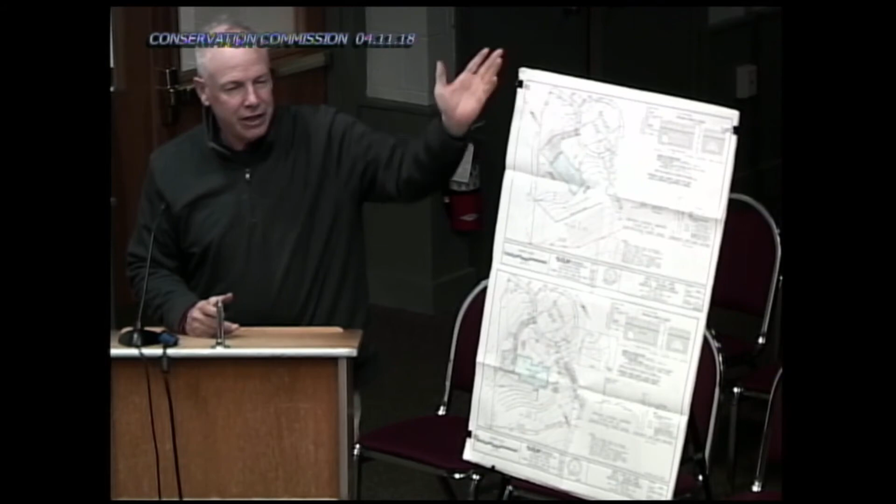If we do the calculations and determine whatever the flow is, is the commission of the mind that they want this pipe to go back underneath the driveway and into the catch basin, which would then flow into the detention basin, or are they more comfortable directing the water into the wetland, which will better sustain it?

We won't know until you bring the whole thing back to us. So it shouldn't be these little piecemeal things. Those are the two options - whatever the flow of water is, you're not taking water away from what was going to the wetland originally, because it wasn't going that way.

We're talking about the water that was going the other way. So now that's the issue, I guess. As I said earlier, we're taking water that wasn't necessarily going to the wetland - it was going overland. Now, if what we've done stands, we're directing more water to the wetland across the other side of the street, which, in my estimation, would be enhancing the wetland rather than diminishing the flow there.

You want the wetland to be filled in because it's an isolated wetland in someone's front yard, and you think that's fine? If it was isolated, I would have filed for an isolated wetland determination, but we determined that it wasn't isolated.

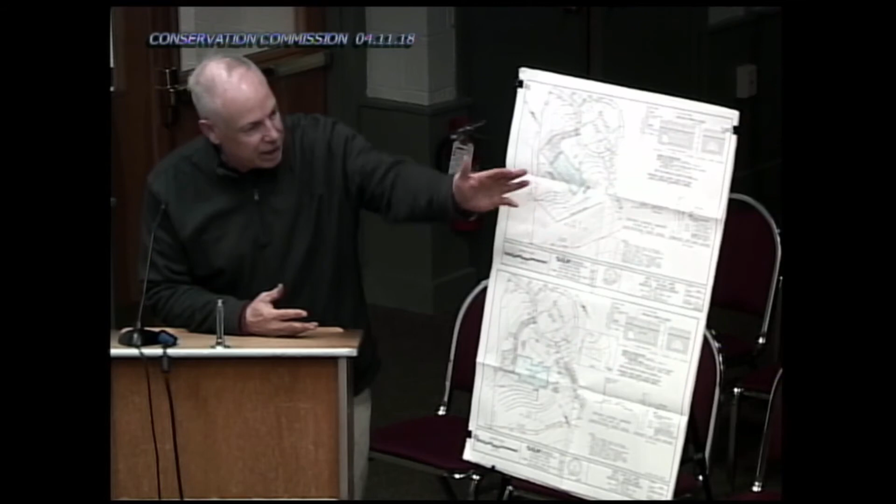Right, okay, a finger wetland, you're right. It's a finger length. My concern is what's the impact of putting more water there, because honestly, potentially it would already be better for me to just fill it and replicate like a bigger, larger chunk of wetland down here and give you twice as much.

So for the next meeting, Rob should come with calculations. I will reprimand him again. I did ask him to call Landis several times to discuss this. No, but I mean come to the meeting, to the commission. I know, but he has to come prepared to the meeting with the information that possibly should have been presented early on, and how he's gonna address it.

Yeah, that's pretty simple. I'm doing the best I can. I'm trying to. You mean he's not available to come to meetings? I think he is, but can you put him on first?

When's the next meeting? Well, we have a horrible meeting the next meeting. I mean, a fun meeting the next meeting. All right, let's plan for like the first Wednesday meeting in May.

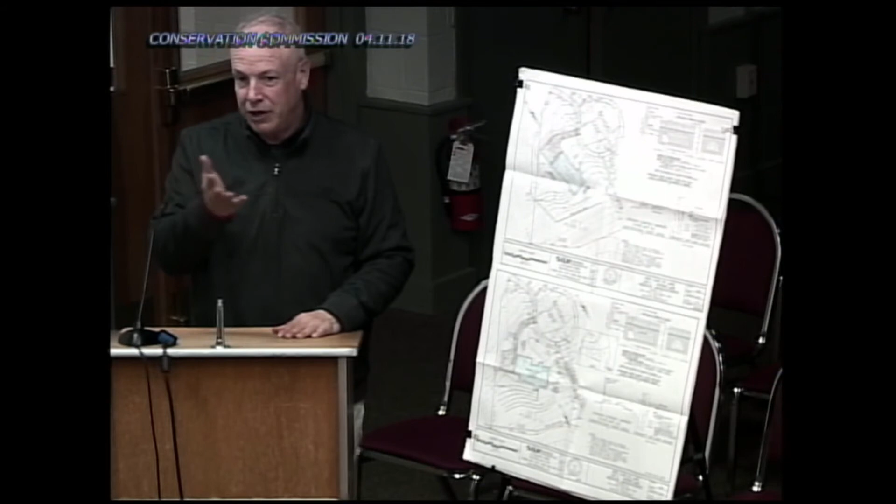And we don't operate that way, with the engineer passing information like everything seems to be okay through another person. No, I understand, but they stamped the plan, and it's our job to build it according to the plan. Now, if the original problem arose because we didn't do something according to the plan, and we now go back and do it so that it is in compliance with the plan and everything works, then who's wrong in this equation?

Okay, what we have is, it was incorrect information or insufficient information with the original filing. Yeah, and we want him to address that. Okay, now whether it, and what change, if any, would be, I think choices, alternatives would be appropriate. Okay, what alternatives are there to address that? Then it can come before us, and we can decide what sounds like the best way to resolve the issue.

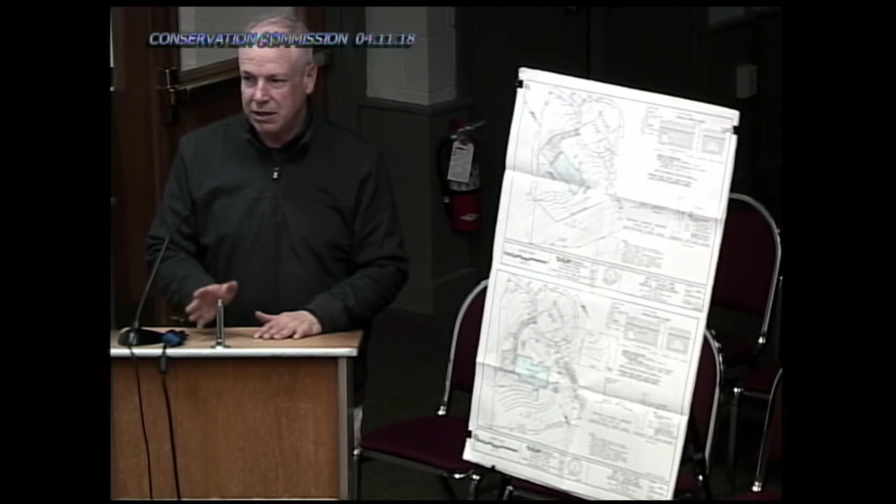Mr. Chairman, is it possible that I could have him submit the information directly to Landis, because Landis would review it, and if she thinks it's necessary to come back to the commission, we'll come back at the first meeting in May. If not, if Rob has, if GLM presents information and has discussion with Landis, and Landis has some sort of agreement or disagreement, then we come back to the commission.

You've been doing this for a long time, and I'm prepared not to sign off on any building permits that come in front of me until this is addressed. Also, I have a comment. I don't know how many times to say this, that this needs to be addressed. It's been said for months.

All right, also I have a suggestion for Amy for the minutes, because I'm looking back at the minutes, and it's okay that the minutes for most enforcement orders are terse. This one, I think, let's really reflect that we said we want Rob Truex to come, because it doesn't quite say that, and I know we said it. Just let's say it so that, because I just looked back to see what did we say. I suppose we could look at the meeting tape, but I feel like we're saying this stuff over and over again.

I think we've settled this, that we have town meeting on the 7th, and our next meeting is the 9th, so that probably will go to that meeting, so we don't have the 9th. So the next meeting after that is the 23rd. May 23rd.

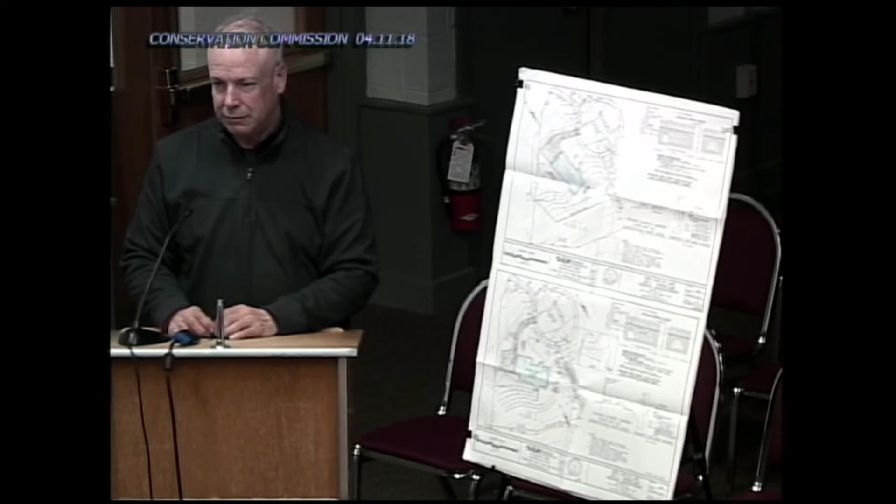I like coming to meetings, so what can I say? All right, so you want to be put on for our last hearing. We have a bunch of hearings, they're all bunched up, so it's 7:45, but I'm sure we are not going to be done with that. Which date? Will be at least 10 o'clock.

So you want to put him on April 25th? Sooner the better. Well, let's get it done. If we put it off, then he'll just... So I would say we're looking, if you want to put a time down, 8:30. And it may be later, so you're aware of that. So put this for 8:30 on April 25th for discussion. Great, absolutely. Thank you.

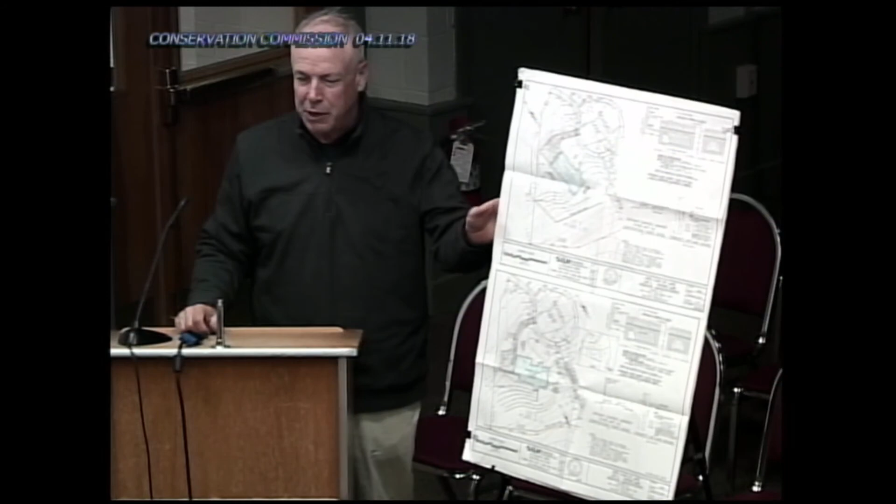We'll chain them up and we'll bring them. We'll have the information ahead of time. We need whatever is being presented, so we have time to look it over. Absolutely. Right, thank you.

Is there anything you wanted to discuss on Burns Avenue? Was that all done? Did you finish the work at Burns Avenue? Right now, the environmental people are waiting for the paperwork to come back from the disposal sites. You did the excavation, removed the material. Did you find any additional? No, so what you excavated is all that needs to be excavated?

Correct. Now, because of the wetness of the site, it was difficult for us to bring material in there, and we weren't ready to haul the material out until the disposal sites review the paperwork and accept the material. So at the present time, the excavations are open with caution tape around them. I was down there tonight.